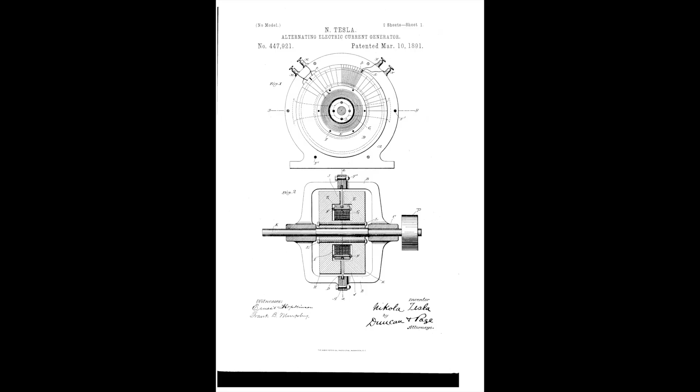The War of Currents was a conflict between Thomas Edison and the partnership of Nikola Tesla and George Westinghouse, both sides claiming that the form of electricity they had created was the most convenient and useful: direct current versus alternating current.

This vicious conflict of slander and money caused not only innovation and progress, but also the creation of unethical systems of execution and murder. After the Chicago World's Fair was powered by alternating current, the industry compromised, realizing that alternating current was better for long-distance transmission.

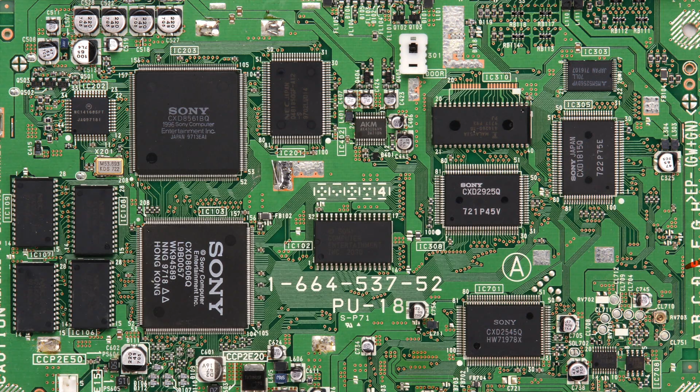Yet direct current was more suitable for use in smaller, low-voltage devices. Today, in the aftermath of the war, alternating current and direct current semi-peacefully coexist, but we are getting ahead of ourselves.

Now we'll go back to the time before Edison had invented his light bulb to see how the aforementioned conflict came about. Thomas Edison was born on February 11, 1847 in Milan, Ohio.

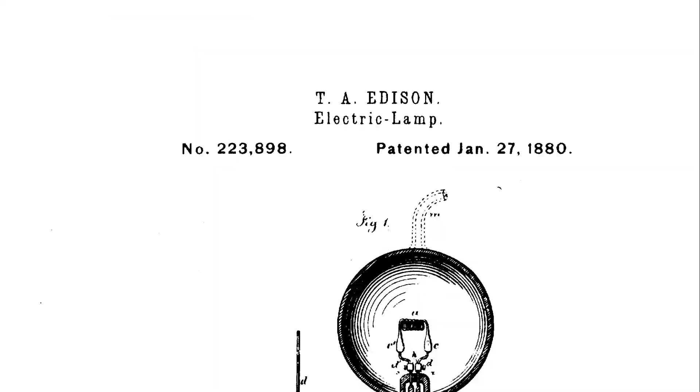He invented the first practical incandescent light bulb in 1879 and would go on to hold over 1,000 patents. In addition to his light bulb, Edison invented the phonograph in 1877, as well as direct current to power it.

But direct current was inefficient. Despite this, Edison's light bulbs were still a huge success.

Nikola Tesla was born on July 10, 1856, and immigrated to the United States in 1884. He worked for a short time under Thomas Edison. There was one time when Edison promised Tesla a reward of $50,000 if Tesla would improve Edison's dynamos.

As a result, Tesla invented alternating current, which in many ways was an improvement over direct current, Edison's form of electricity. Upon requesting his reward, however, Edison claimed the reward was just a joke, and instead offered a $10 a week raise.

As a result of Edison's joke, Tesla quit his job in 1885 and instead sold his AC patents to George Westinghouse, forming the Westinghouse Electric Company in 1886.

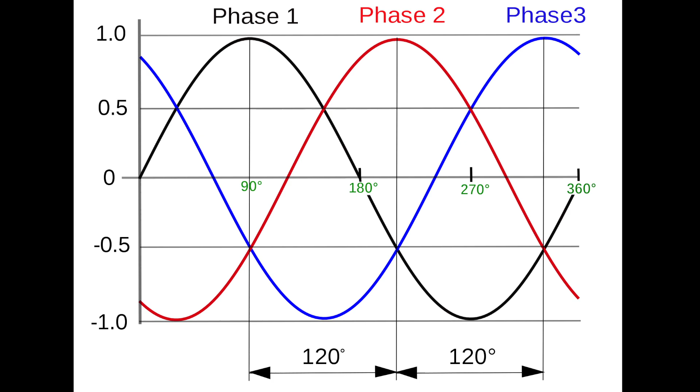A very large benefit of AC was that it could very efficiently change voltage. DC could only change voltage by using DC to power another DC generator, which generated electricity of a different voltage.

This system is very inefficient because the electricity used to power the generator is wasted. AC, as opposed to DC, will constantly change the direction which the current flows. It does this by rotating a magnet near the current very quickly.

Magnets have a north and a south pole, with positive and negative charges respectively, and electricity only has a negative charge. When the north end of the magnet with its positive charge is pointing one way, it attracts the electricity and pulls it along the wire.

When the south end with its negative charge points that same way, it repels the electricity and pushes it in the opposite direction.

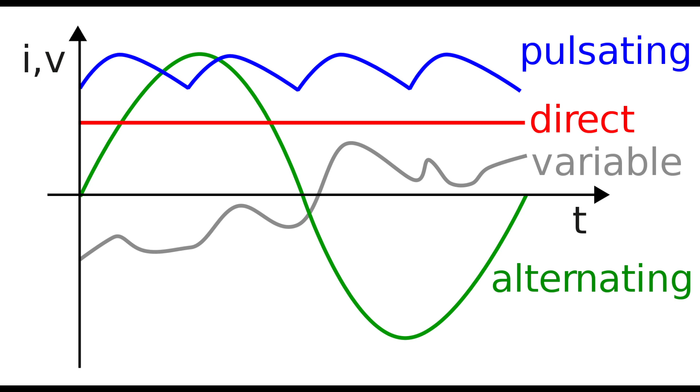AC can change voltage using a dual electromagnet where a soft iron core has an input and an output wire wrapped around two parts of it.

The input wire must be wrapped around the core a different number of times than the output wire for the voltage to change. AC changes direction frequently, so this will create an electromagnetic field around the soft iron core, which has strength dependent on how many times the input wire was wrapped around the core.

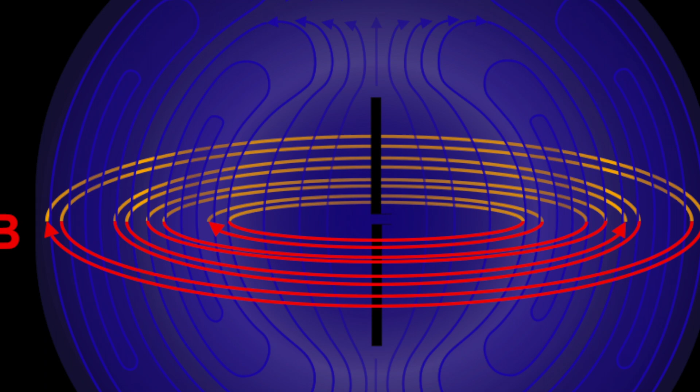Thus, the ratio of the number of times the input wire is wrapped around the core to the number of times the output wire is wrapped around the core is equal to the ratio of the input voltage to the output voltage.

Minimum energy is wasted in this process. Because of this and abundant other benefits, AC was successful to the point where it threatened Edison's income from his DC.

Edison launched a campaign to discredit AC by showing its dangers, hoping to convince people that DC was safer so he could get more money. The only problem was that AC was actually not any more dangerous than DC, so Edison had to use misdirection to fabricate claims of fake dangers instead of demonstrating actual ones.

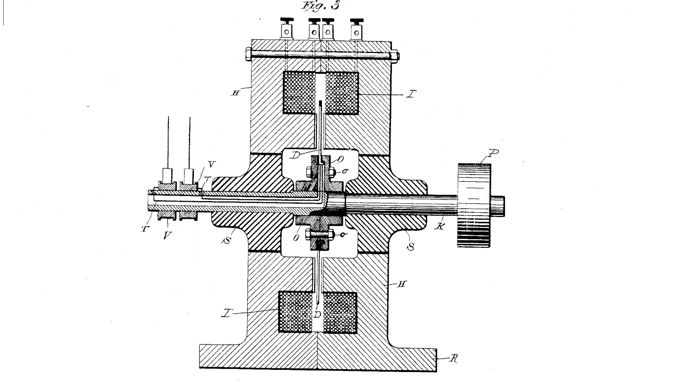This campaign formed most of the War of Currents. Towards the beginning, Edison made a bold claim that, 'Just as certain as death, Westinghouse will kill a customer within 6 months after he puts in a system of any size.' This was false, but people had no reason to think so, since this was an entirely new form of electricity that relied on current sending electricity back and forth really fast, which seemed dangerous.

Edison proceeded to encourage this thinking by publicly showing the dangers of alternating current. He began electrocuting stray animals with AC to prove how dangerous it was, though really any type of electricity sent directly through an animal would be dangerous, not just AC. Edison also invented the electric chair using AC to electrocute humans, first used in 1890 to execute William Kemmler, a convicted murderer.

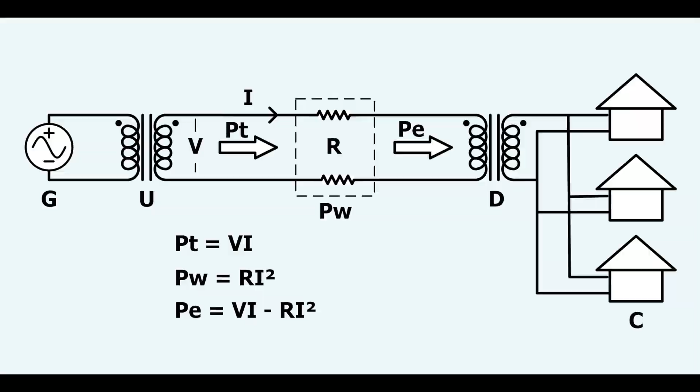AC being dangerous was only half true. AC had a significantly higher voltage than DC, making it unsuitable for low-voltage applications. However, DC was terribly inefficient at long-distance transmission, which didn't need to worry about too high a voltage, since strong wires are designed to handle extremely large amounts of electricity.

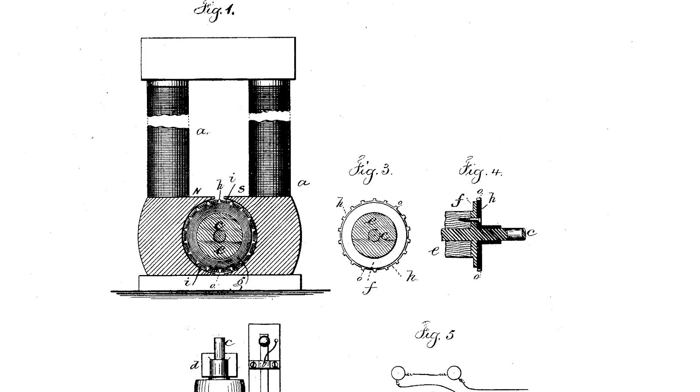In 1892, the General Electric Company was incorporated and acquired all the assets of the Edison General Electric Company, as well as two other companies. This meant General Electric owned the rights to direct current, making it a rival of Westinghouse and Tesla's alternating current.

The Chicago World's Fair would be the climax of this war. It would be powered by DC, showing the world DC was perfect for everyday use, or powered by AC, showing AC was at least as useful as DC. DC bid to power the fair for around $1 million in today's money. AC's bid was half that. But Edison had not given up yet.

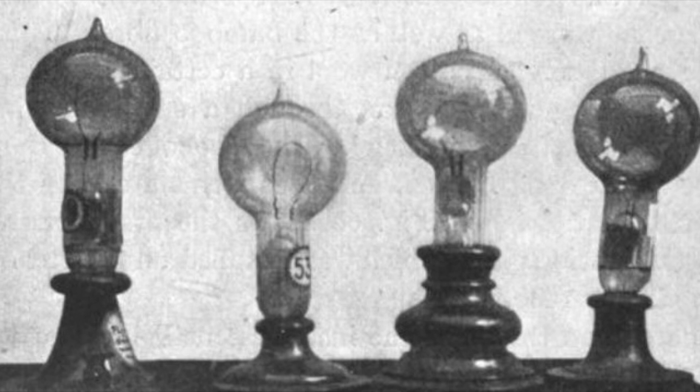General Electric refused to sell light bulbs to Westinghouse, who needed them to light up the fair. The Westinghouse Electric Company had to develop their own light bulbs, and in a pretty short time frame, they did. Looked like AC had finally won the War of Currents.

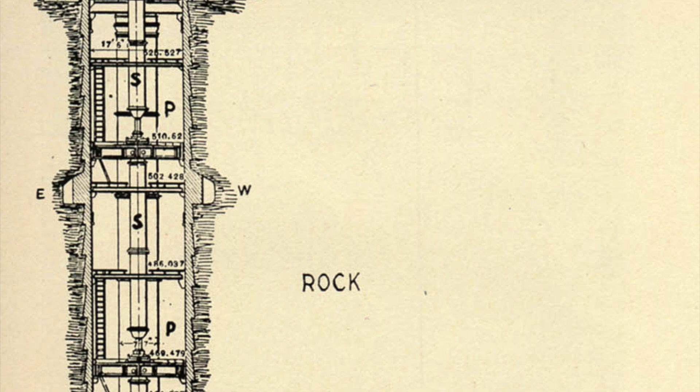And AC mostly had. In 1895, Tesla built an AC generator that used the current of Niagara Falls. But Edison still did not give up. In 1903, he electrocuted Topsy the elephant on video in front of 1,500 people, broadcasting to America that AC was dangerous.

But he failed. People still use AC. Today, AC is used nearly everywhere in long-distance wires for transmitting electricity, but DC is still used inside homes and in low-voltage devices such as battery chargers and automotive applications. And contrary to Edison's claims, evidence shows that AC is actually safer than DC in some ways.

If the War of Currents had a winner, it would be Tesla, but the evidence shows there may not have been a winner at all.